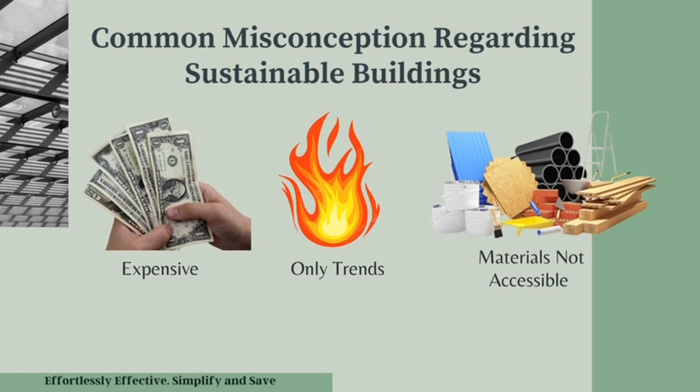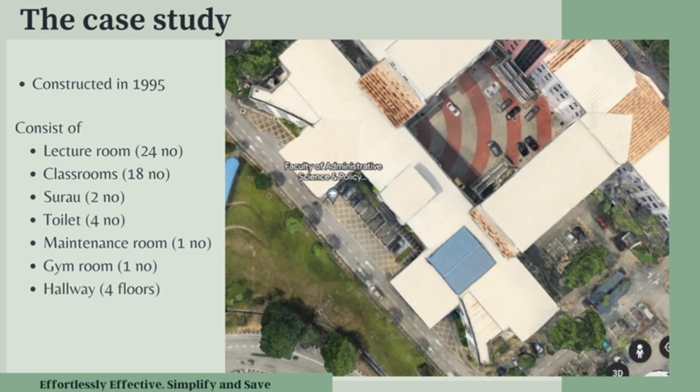Our presentation focuses on the Faculty of Sports Science and Recreation at UiTM. To date, no assessment has been conducted to evaluate the building's sustainability. We undertook a comprehensive analysis to gain insights into its current environmental status. Our study aligns with established green building standards in Malaysia, such as GBI, MyCREST, and GreenRE, which emphasize key aspects of environmental sustainability.

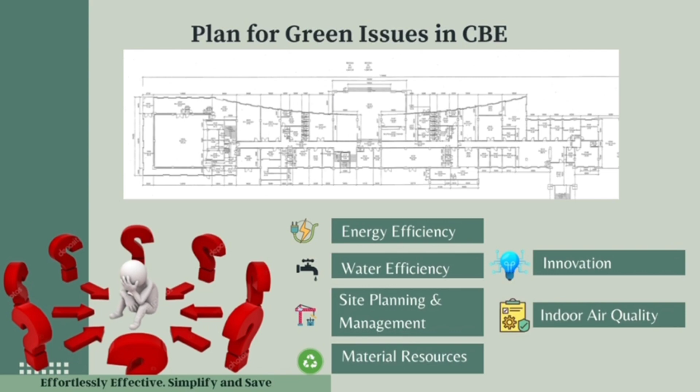To begin, we would like to address the issues we have identified using green rating tools as a reference. These issues are categorized into physical concerns, energy efficiency, water efficiency, site planning and management, material resources, innovation, and indoor air quality. Our analysis found several green issues at the FSR building in terms of energy efficiency issues.

We noticed that most of the hallways at the FSR building were lighted during the daytime because of the absence of natural lighting. The air conditioners and lamps were switched on in several classes even when no one was using the class. Moreover, some of the lamps, as well as spotlights, were broken and were not being replaced. Most of the gym equipment used high usage of electricity.

All the existing lighting systems used were non-energy efficient lighting systems. Adding to this, the air conditioners used are central air conditioning, which is known to be outdated technology nowadays. It needs more maintenance compared to updated models.

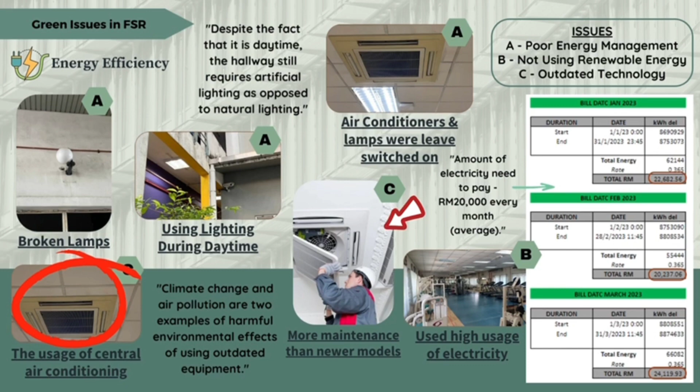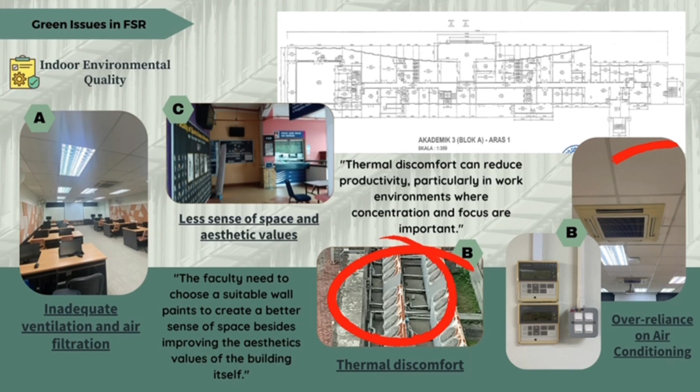Next is indoor environmental quality. It is important to have good airflow and a sense of space in a building. Inadequate ventilation and air filtration, as well as ignorance of the usage of natural ventilation in a building, may lead to several issues. Over-reliance on air conditioning, thermal discomfort, and physical discomfort are the issues that arise if good ventilation systems and air filtration are absent.

Other than that, the choices of wall paints being used have lessened the sense of space and aesthetic values of the building.

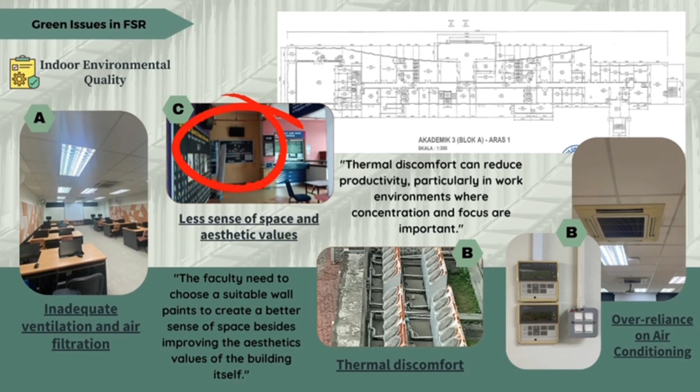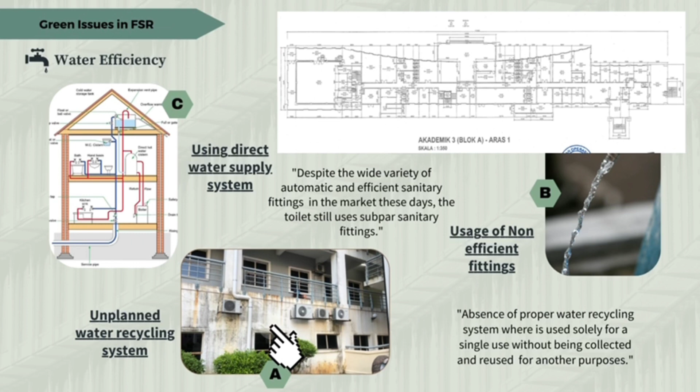Next is water efficiency. During our site visit to the faculty, we discovered a number of problems that hinder the facility's ability to operate efficiently and promote sustainable water consumption. For instance, we discovered an impromptu water recycling system that is visible from the exterior, as well as the use of inefficient sanitary fittings in the restroom and the use of a direct water supply system.

Next is site planning and management. We discovered that the building lacks shading, due to direct radiation from sunlight penetrating the building, leading to a substantial rise in internal temperature.

Next, we found an issue about the usage of chemical-based pest control that could cause contamination of the surrounding area and health issues. We also found that there is a lack of green parking space as well as charging infrastructure, and the parking spots available are limited.

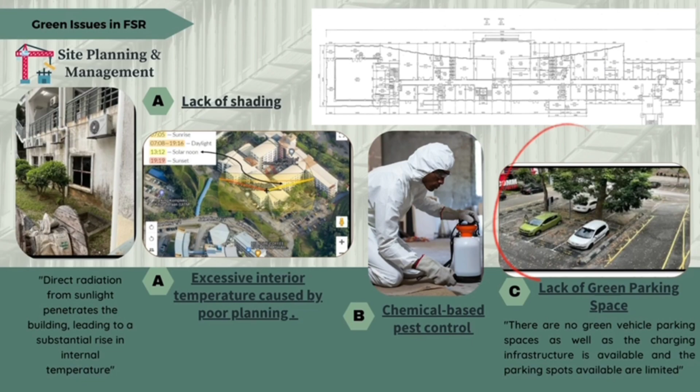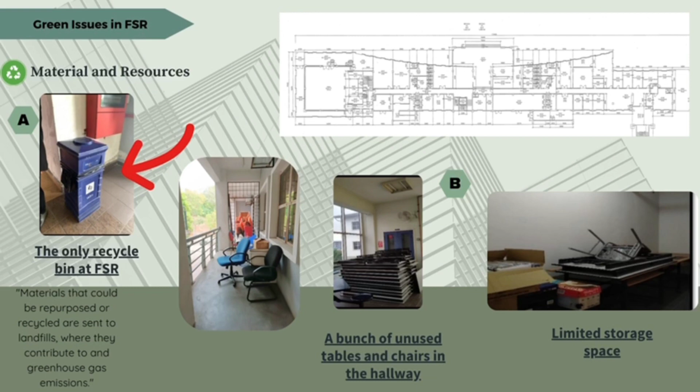Next is material and resources. The current insufficiency of recycling facilities provided by FSR leads to a significant carbon footprint, discouraging recycling among users and resulting in increased waste and pollution.

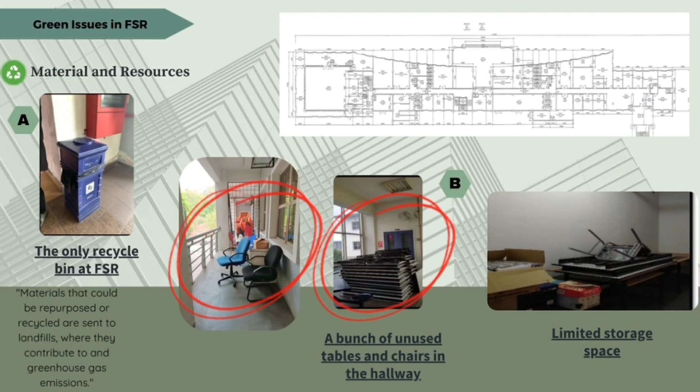Besides, the Faculty of Sports Sciences and Recreation, FSR, faces a pressing issue of a cluttered and disorganized environment due to improper storage of unused materials, posing potential risks and hazards for students and faculty members.

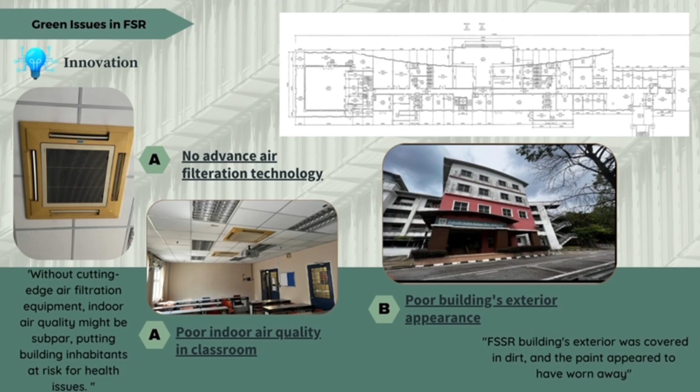Under the GBI element of innovation, we found few issues, including no advanced air filtration technology and poor building exterior appearance. Without cutting-edge air filtration equipment, indoor air quality might be subpar, putting building inhabitants at risk for health issues. Not only that, during the site visit, the building's exterior was covered in dirt, and the paint appeared to have worn away.

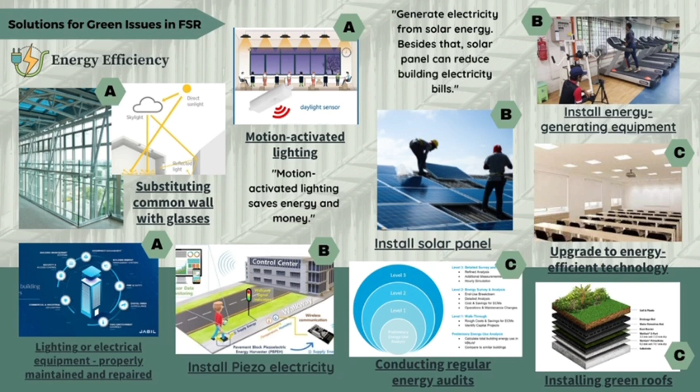To solve the energy efficiency issues in FSR, we proposed to upgrade the appliances used into energy-efficient appliances. For instance, all the lighting systems can be changed into motion-activated LED lighting systems.

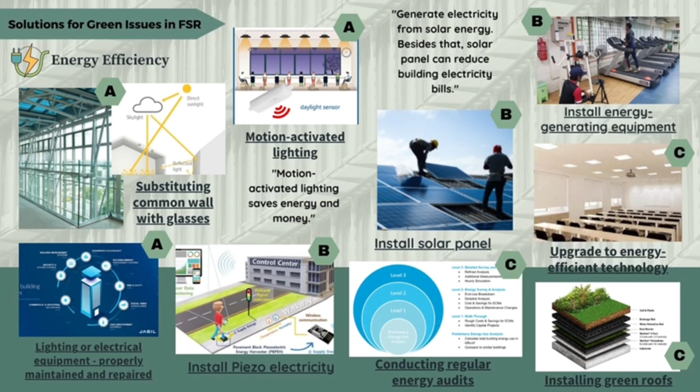Other than that, the installation of piezoelectricity, solar panels, and energy-generating gym equipment was suggested as approaches to reduce electricity consumption and generate more energy.

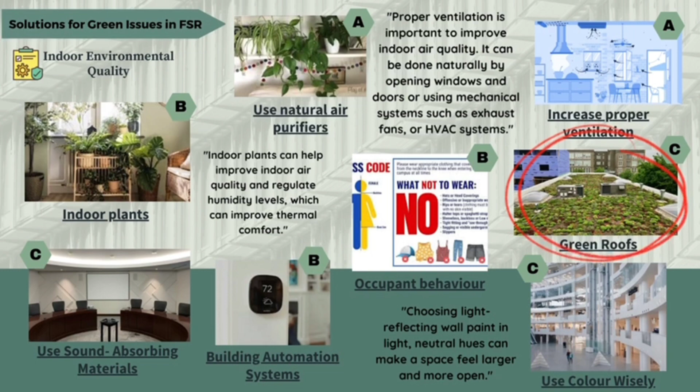Furthermore, the installation of green roofs and the usage of sound-absorbing materials in a building can lessen noise pollution and act as insulation. Changing the color wisely can increase the sense of space and aesthetic values of a building. For example, it is suggested to use lighter and soft colors to look more spacious.

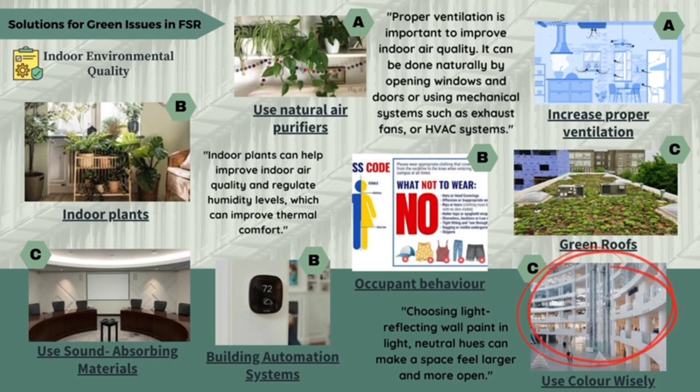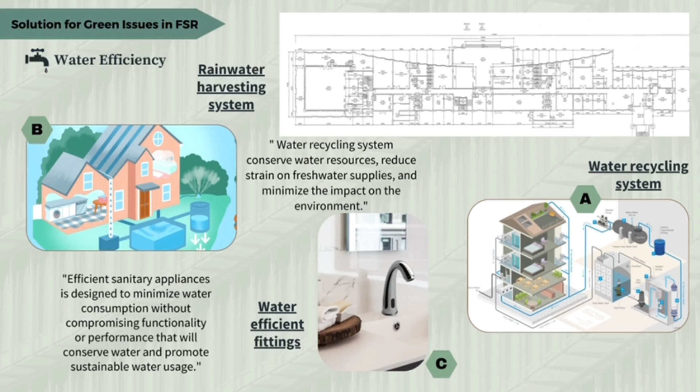To promote water efficiency, we suggest replacing the unplanned water recycling system with a proper and effective water recycling system, reconfiguration of the plumbing system to incorporate a rainwater harvesting system, and upgrading sanitary fittings to efficient sanitary fittings.

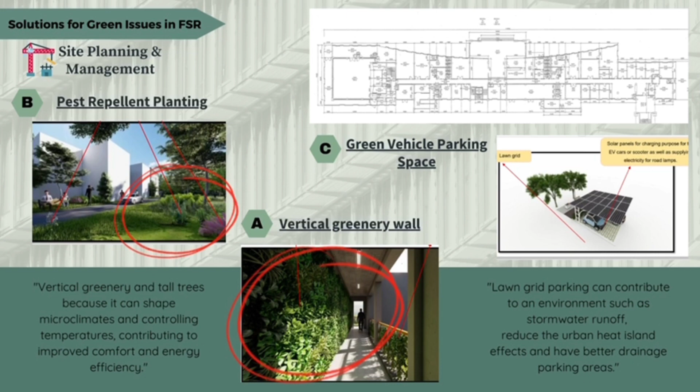Next, we proposed the best ways regarding site planning and management issues, including vertical greenery walls, pest repellent planting, and green vehicle parking space. Vertical greenery walls and pest repellent planting have the benefits of controlling temperatures and acting as natural pest control. Lawn grid parking can contribute to reducing heat island effects and better drainage at parking spots.

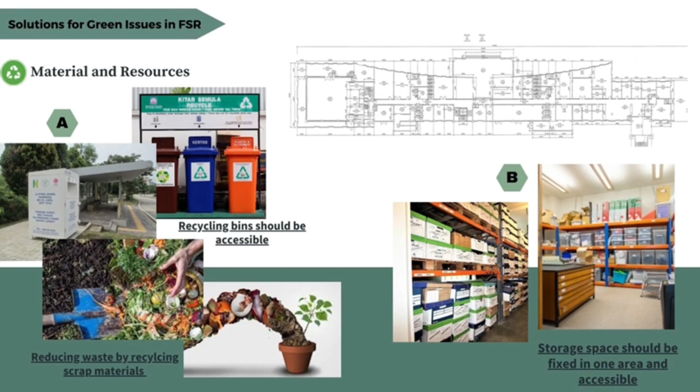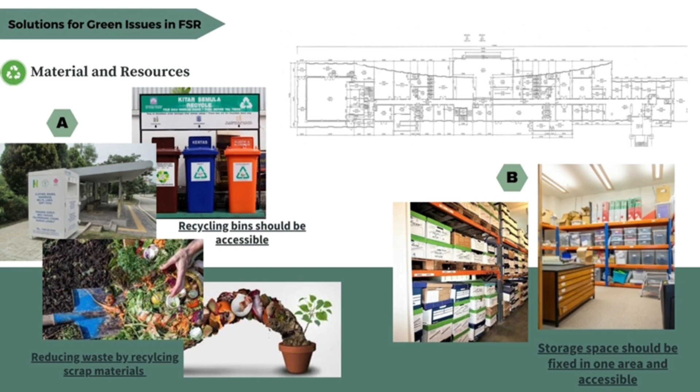Material and resources focuses on strategically placing recycling bins and donation bins in convenient locations campus-wide. Implementation of anaerobic digestion or composting methods within the building to recycle organic waste, reduce landfill waste, and decrease greenhouse gas emissions. Our proposal also suggests establishing easily accessible storage spaces throughout the building. These designated storage areas will be clearly marked with signage and labeling to ensure proper organization.

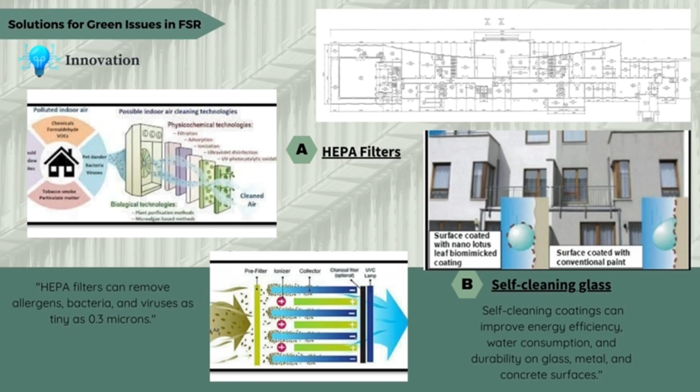To counter the issues regarding innovation, we suggest that the buildings are installed with HEPA filters and self-cleaning glass. HEPA filters can remove allergens, bacteria and viruses as tiny as 0.3 microns, which is very useful for the occupants. The total cost of the proposed project is estimated at RM1,864,826.01, with each element allocated a specific budget.

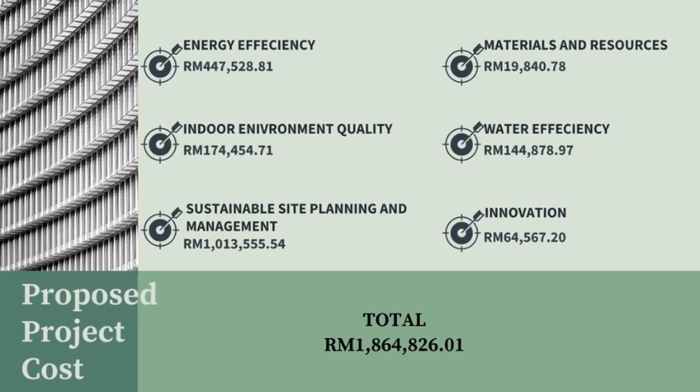Our company proposes obtaining the cost data for the project through two methods. Firstly, we will gather quotations from contractors and suppliers, as well as update the tender price index (TPI) using data from previous projects, specifically a 2021 project located in Terengganu. To illustrate, we have obtained quotations from specialist contractors for the solar panels and rainwater harvesting system.

Additionally, for the LED lights and motion sensing, we have utilized cost data from previous projects, adjusting them for factors such as the cost index, location index, and price index. It is important to note that we have accounted for additional costs of 5%, with 2.5% allocated for both profit and attendance for all items.

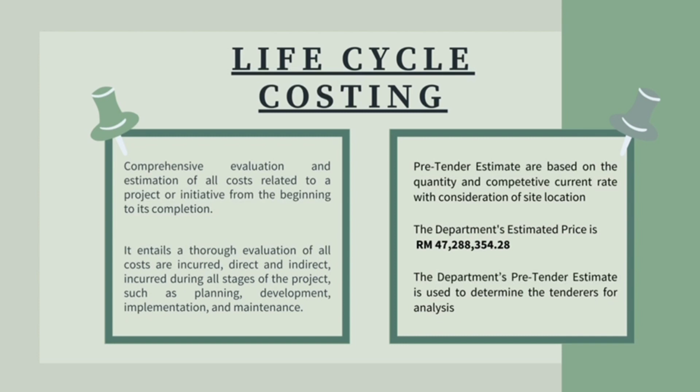Next is life cycle costing, which describes a comprehensive evaluation and estimation of all costs related to a project or initiative from the beginning to its completion. This includes a thorough evaluation of all cost elements, including labor, supplies, machinery, technology, overheads, and any potential risks.

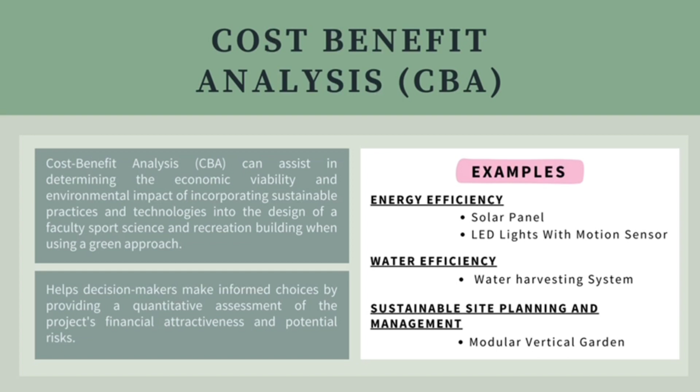We have also done the cost-benefit analysis. CBA can assist in determining the economic viability and environmental impact of incorporating sustainable practices and technologies into the design of a faculty of sports science and recreation building. For this presentation we have chosen 3 elements to show the CBA, for example, the solar panel: appliances and certain rooms will be powered by electricity produced by solar panels.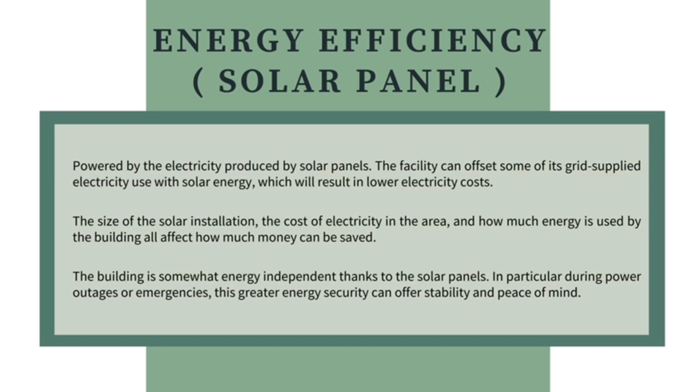The facility can offset some of its grid-supplied electricity use with solar energy, which will result in lower electricity costs. The size of the solar installation, the cost of electricity in the area, and how much energy is used by the building all affect how much money can be saved.

Next, LED lights with motion sensors only activate when motion is detected, and automatically turn off when no movement is detected for a specified period. This feature eliminates the need for lights to remain on constantly, leading to significant energy savings. Compared to traditional lighting options, LED lights consume less electricity, resulting in lower energy bills over time. They also reduce maintenance and replacement costs since LED lights have a longer lifespan compared to traditional incandescent or fluorescent lights.

For the water harvesting system, it reduces reliance on costly municipal water, resulting in reduced water bills. Maintenance costs are also lower than those of alternative water systems.

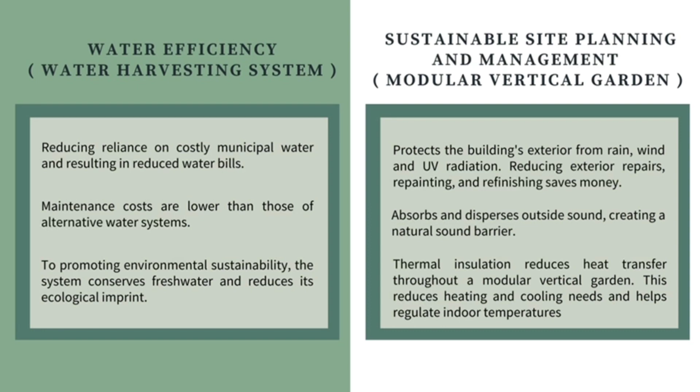For the modular vertical garden, it protects the building's exterior from rain, wind, and UV radiation, reducing exterior repairs, repainting, and refinishing, which saves money. It absorbs and disperses outside sound, creating a natural sound barrier. It also provides thermal insulation, reducing heat transfer, which in turn reduces heating and cooling needs and helps regulate indoor temperatures.

The application of sustainable building elements in the Faculty of Sports Science complex at Universiti Teknologi MARA is to clearly articulate the objectives of sustainable building, which include the reduction of energy consumption, promoting energy efficiency in the building, ensuring a healthy and comfortable indoor environment for occupants, promoting the use of sustainable materials and minimizing resource consumption, minimizing the environmental impact of the site, enhancing ecological integrity, and promoting resource efficiency.